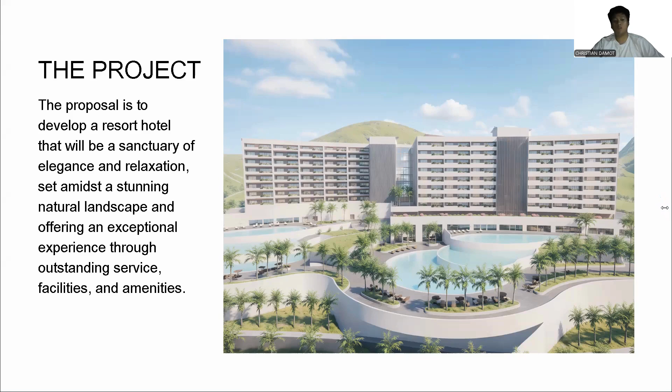Problem: Tagaytay is one of the Philippines' premier tourist destinations, renowned for its cool climate, breathtaking views of the lake, and proximity to Metro Manila. Despite its popularity, there is a growing need for hospitality establishments that can elevate the region's tourism appeal by combining luxury, sustainability, and architectural harmony with the environment.

Project goals: The project goal is to design a luxurious five-star hotel resort in Tagaytay City that serves as a flagship tourism destination, offering superior hospitality service, sustainable architecture solutions, and harmonious integration with the natural beauty of the area.

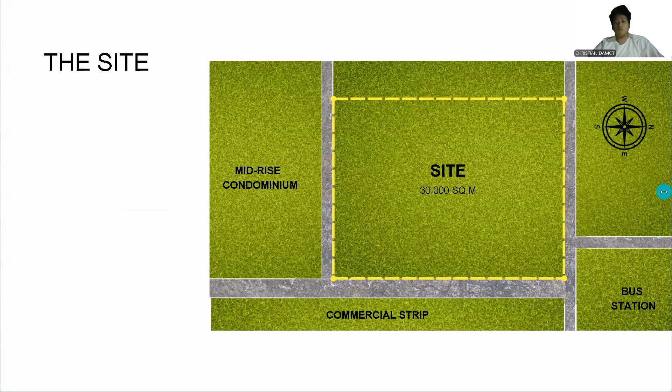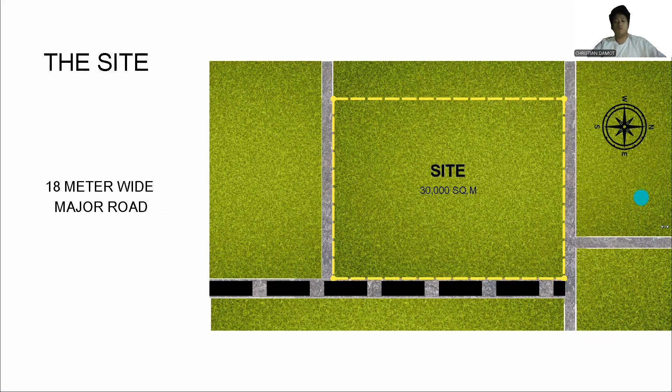The site is near a mid-rise condominium, commercial strip, and bus station. The site has 30,000 square meters and is accessible via an 18-meter major road and 12-meter wide minor roads on both sides of the site.

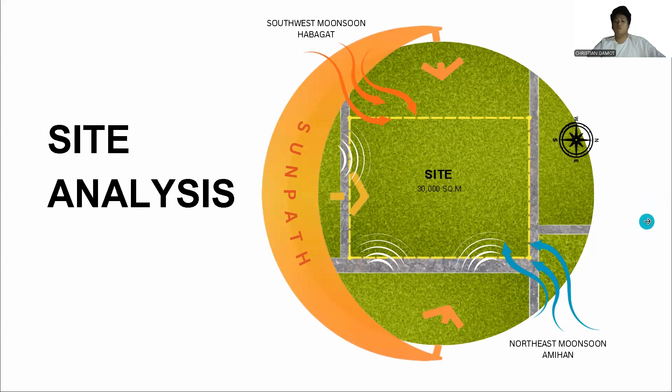Site analysis: the site facing needs to cover natural ventilation, and it also produces cold wind, especially during certain conditions.

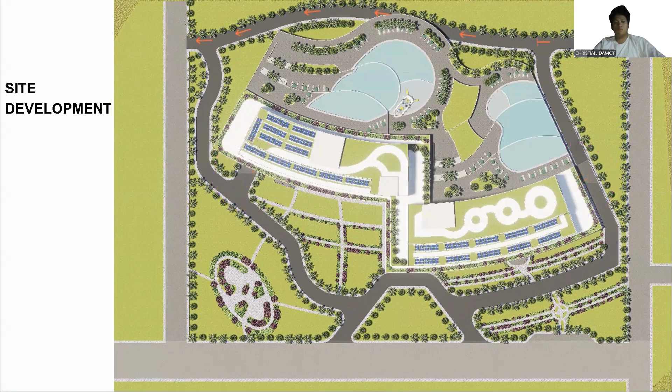Site development plan: existing road, entry and exit, parking entry and exit, and service road.

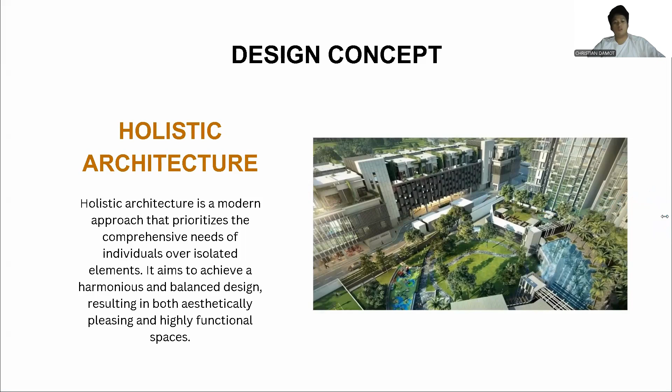Design concept: the design concept of my design is holistic architecture. Holistic architecture is a modern approach that prioritizes the comprehensive needs of individuals over isolated elements. It aims to achieve a harmonious and balanced design, resulting in both aesthetically pleasing and highly functional spaces.

Design philosophy: Building art is a synthesis of life in material form. We should try to bring in under the same hat, not in a splintered way of thinking, but all in harmony together - by Alvar Aalto.

These are my design considerations: accessibility, views, aesthetic, comfort, flexibility, safety, security, environment, circulation, orientation, and efficiency.

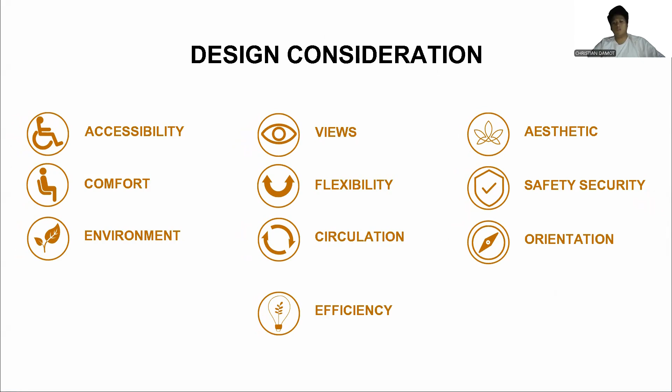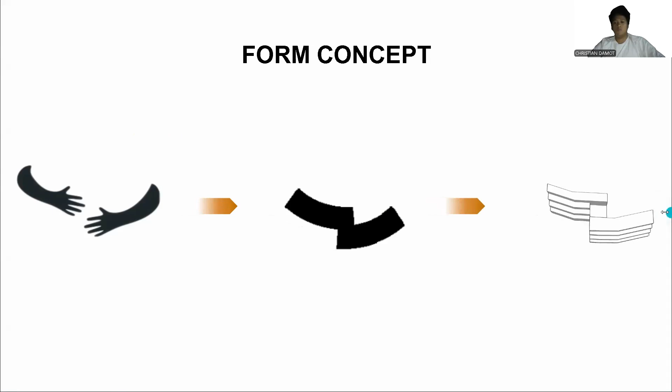Form concept: my form concept is a gesture of hug. The translation is a form of a gesture of hug, then transformed into a shape of two rectangles that curve, and then subtract the shapes.

Characteristics: my design has modern tropical architecture because of the use of wide windows and open spaces, integration of greenery, use of a light color palette, and use of curvilinear forms.

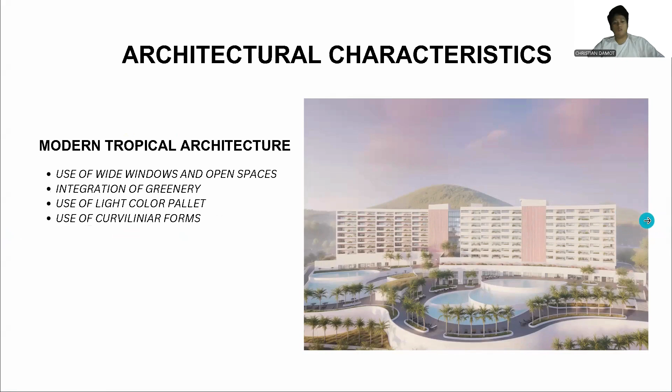Initial schemes: public space on the ground floor with the lobby, restaurants, and event halls, while the private guest accommodations are located on upper levels for privacy and exclusivity.

Expansive glass windows and private balconies bring the outdoors in, ensuring natural light and ventilation, and maximizing views of the lake, with outward-facing guest rooms and terraces.

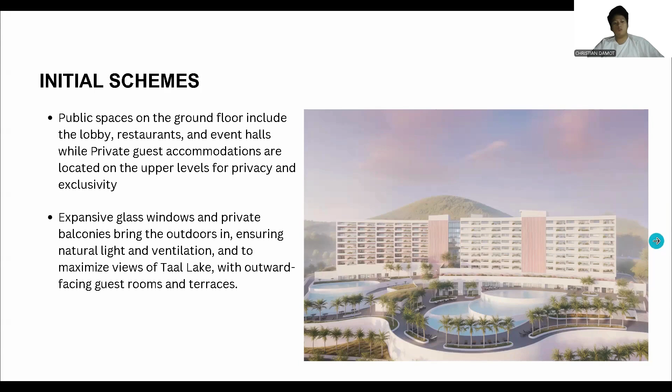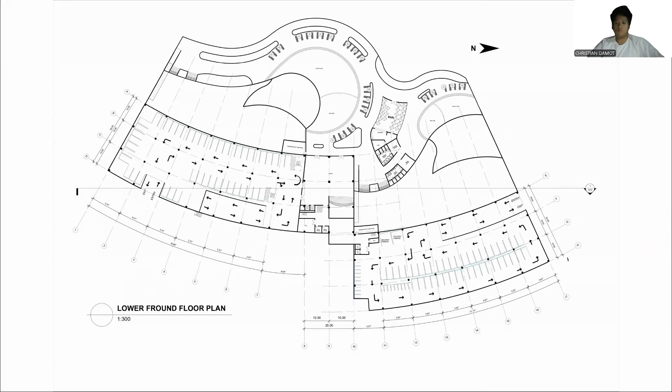Floor plan: this is my basement, which is only used for parking. The lower ground has a second level of public parking, and on the right side is private parking and the delivery area.

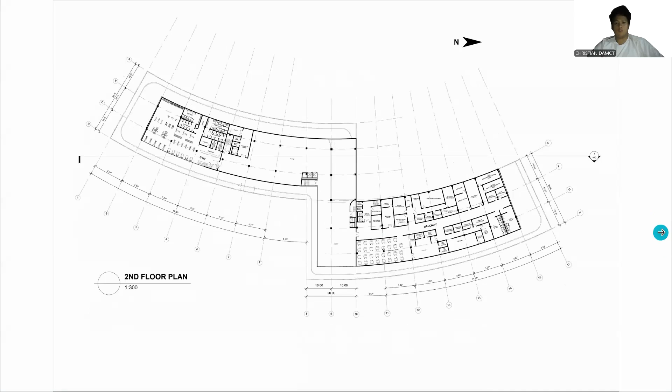Second floor is where the gym and staff office are located.

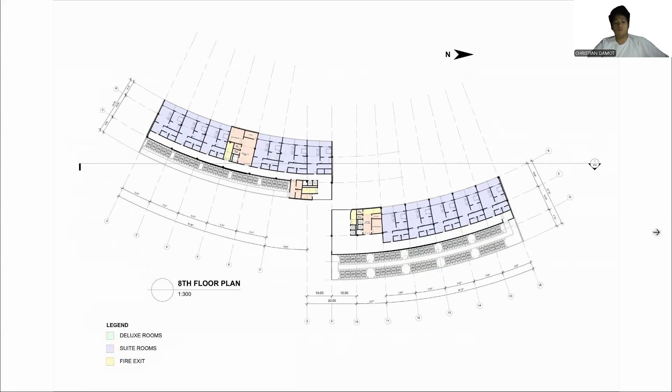The same layout applies from the fourth to seventh floor, while on the eighth floor the deluxe rooms are gone, and only the suites remain.